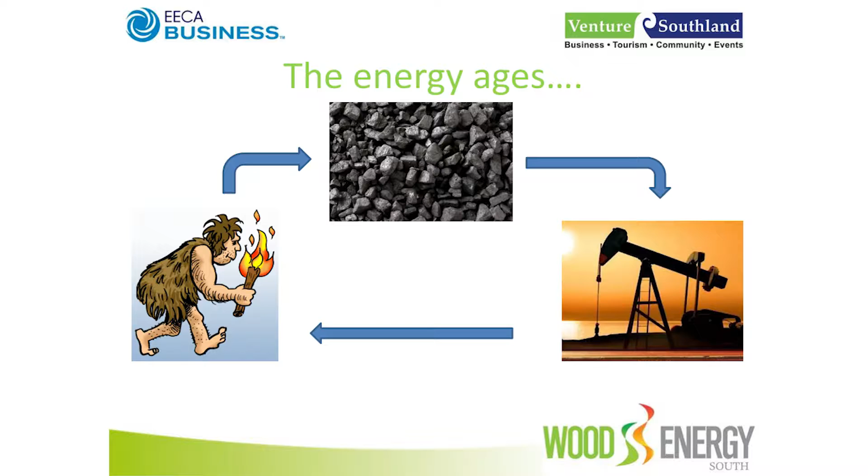Which then led to the oil revolution, and we'd been using oil for quite a while now already. We'd used whale oil, we'd used vegetable oil, but some smart farmer in Pennsylvania in 1859 found some black stuff bubbling out of the ground, so he decided to see if he could pump it out of the ground, and he was able to. That worked too, but it was expensive now, and it's a limited resource.

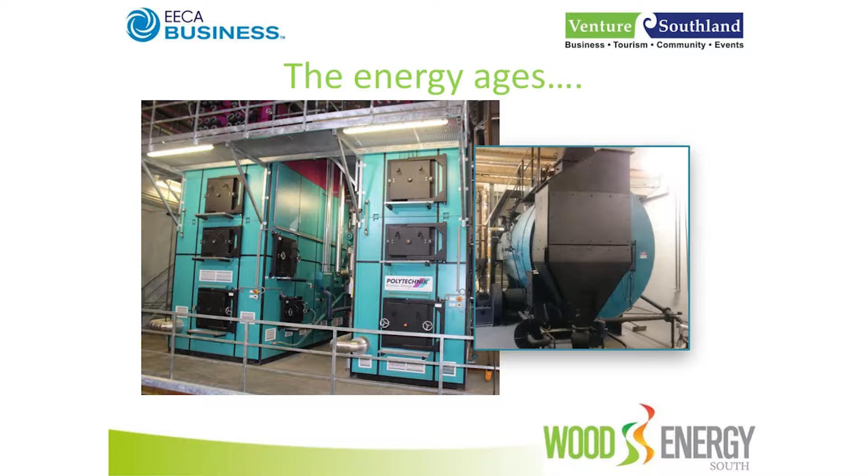And I think our caveman friends would be laughing right now that we're now all huddled in a room together talking about wood energy again. But of course this technology has come a long way in those thousands of years. We now understand how to burn the stuff cleanly, efficiently. We've got the handling of it a lot more understood, and we've been doing that for years now. We understand heat recovery and how to dry our fuel as well.

So just a bit of a political environment that we're sitting in right now. Steve sort of mentioned that. We talked about the Paris Agreement, and the government in March this year announced that it will be removing the ETS subsidy over the next 3 years. So that will slowly go, and MFE have done some work already, and at our current stance we're going to have 150 million tonnes of CO2 deficit, which is a cost of $3.75 to $7.5 billion.

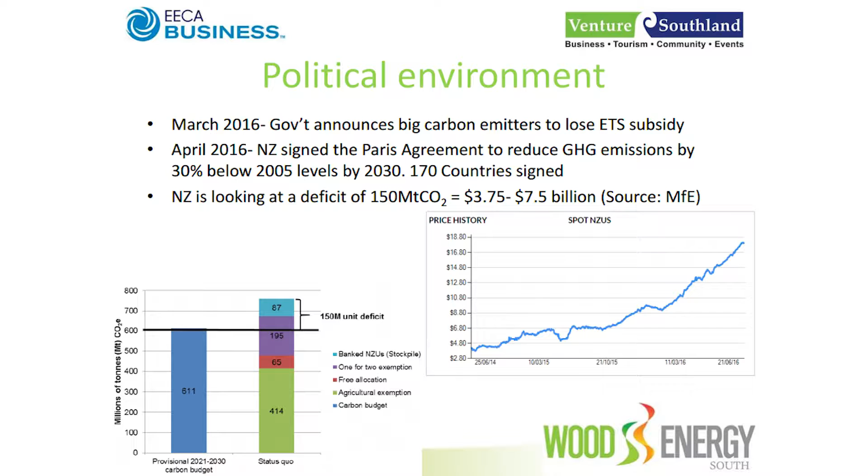And this is our carbon price right now. It's as a result of what's happening. Our carbon price is taking off, and it's sort of settled a bit now. This is sort of sitting around $17.90 right now. So that will help wood energy. But is it enough? Can biomass compete with coal?

I'd sort of developed this graph here just from known values of prices that we've seen in Southland, and once you start getting out to here, for these large users like Alliance, Fonterra, we're talking serious money to convert from coal to wood chip. We're in the millions of dollars, so the price really needs to get up to about $50 for this to start having an impact on coal.

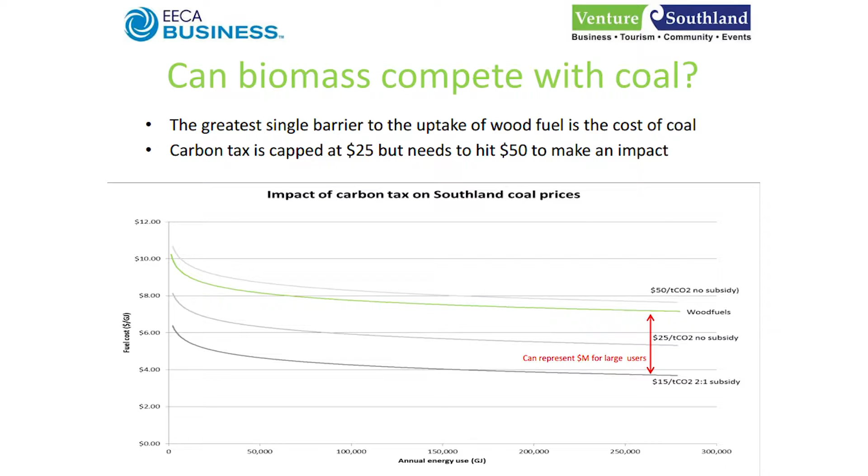So can it compete right now? It's a tough call for these big users, the Alliances, the SCMs. So yeah, it's difficult. We need to get that carbon tax up, or we need to find a cheaper source of wood fuel. So can we produce wood fuels that are cheaper?

I guess the biggest surprise that we got when we went over to Europe was the sort of fuel that was going into these boilers. It was absolute rubbish. It was green. It had all sorts of bits and pieces. I think I saw a bit of a jandal in one of them. It was really all sorts. It was really, really surprising.

They come from compost rejects. They come from bark, demolition waste, branches, pine needles and compost. There was still a market for high quality fuels like we have here, but that was more aimed at commercial, schools, the universities and the likes. These are the sort of prices that they were getting over there.

And yeah, so every site I went to, you saw this type of fuel. And one of the sites we went into, there was a tree. It was about 2 to 3 meters long and probably about 100 mils diameter. It made it all the way through the fuel delivery system and got stuck just before it went into the boiler. You know, they just throw all sorts of rubbish into these boilers and it burns them.

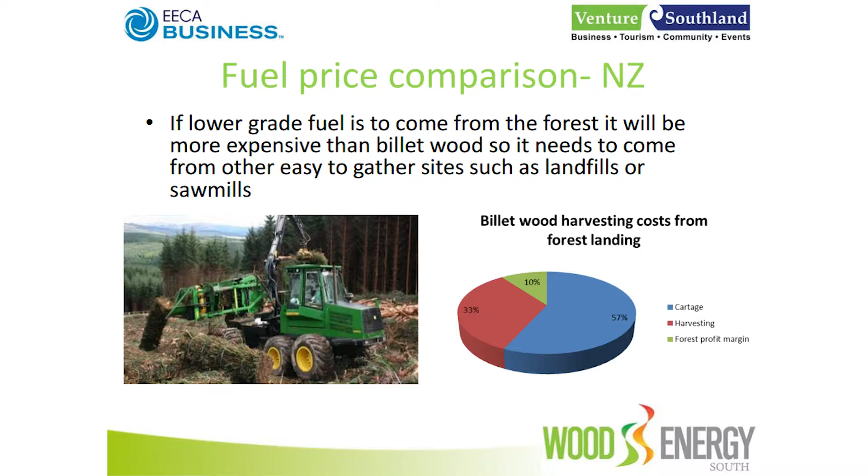So if we start going into, this picture here shows a bundler. Now, I'm not aware if there are bundlers even being used in New Zealand. They sort of go in and scrape the forest floor and grab everything off the bottom and then bundle it up together and send it out. But every time you handle something, it's going to cost you more money. So at the moment, the way our forestry is set up, the easiest and probably the cheapest bit of wood to grab is going to be the billet wood.

If we're going to have to go and grab those smaller bits and pieces that are 1 metre long, there's going to be more handling, and so I can't see how we are going to get down to those sort of values at the moment. So can we get it out of the bush? I'm not sure about that, but can we get it from other areas such as landfills or the sawmills, the green waste? What other waste streams are sitting around? Wooden pallets? What will that do? What other waste resources are around that we could be utilising?

Dunedin, for example, I'd be interested to see how much hops comes out of the Speight's Brewery House. You know, what have we got down here that we could be looking at as another potential biomass source?

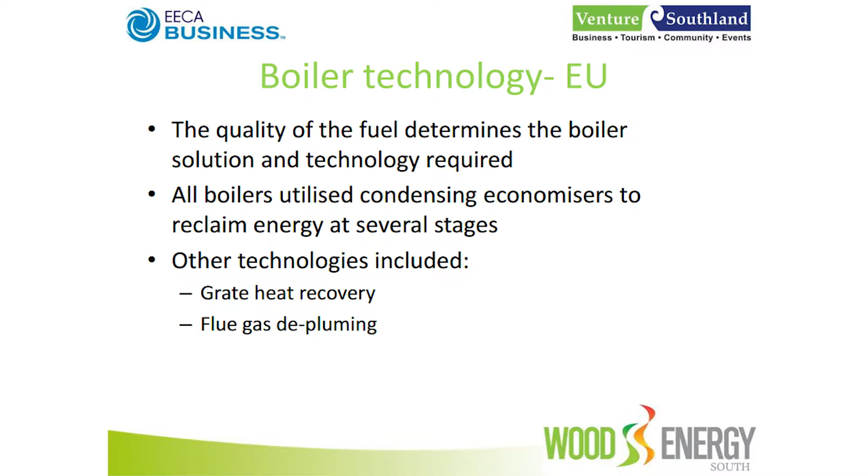Because of the quality of their fuel over there, you needed a really sophisticated boiler to burn it. All of their boilers utilised condensing economisers. They reclaimed energy at all different stages of the process. They had grate heat recovery, grate cooling. They did all sorts of interesting technologies over there, and it's sort of reflected in the type of fuel that they were using.

So this is a screenshot of a boiler. This is a Polytechnik boiler, and it isn't very clear to see, but what you can see in here is our temperatures. So we're getting 600, 800, and then up here we're getting our 900 degree temperatures. So we're getting our highest temperatures in our secondary combustion, nowhere near the flames.

And then we're doing our work, and what I find interesting is following this temperature profile back through the exhaust system. From here we're getting into 200 degree temperatures. We go through an economiser, we've dropped down to 150. So they'll use this for pre-drying something. They'll use it for doing some work on the grate. They might even use it for pre-drying the air coming into the system. They might even do something with the fuel.

We follow that again, 140, 122, and we're coming out of the stack at 41 degrees. So you can actually put your hand on the stack. And they'll use that anywhere. They'll use this for all different parts of the process. There's a heat recovery here that comes off this part of the system, and that goes in and heats the grates. Preheats the air, it does all sorts of stuff.

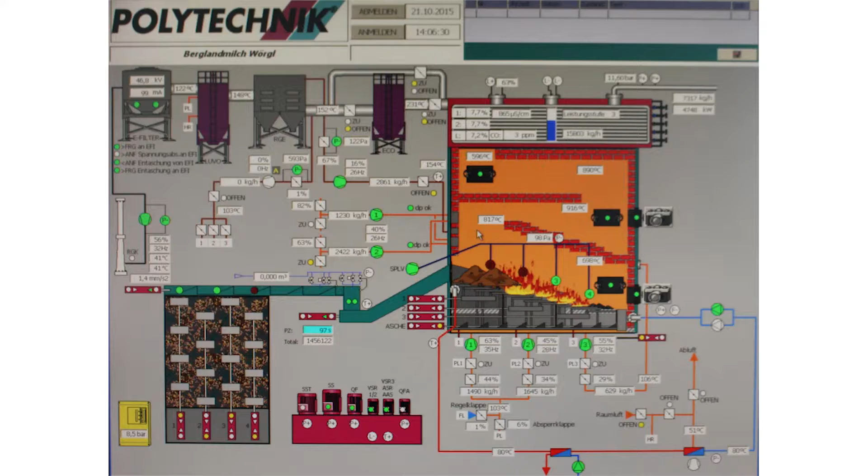So just on that last section between here and this end section here, they grabbed 380 kilowatts of low-grade energy at 70 degrees and used that in another process. But there's a price to pay for that technology, and it was about €5 million for a 6 megawatt boiler, and that was in a dairy factory. So yes, they're using the technology for that awful fuel.

We've got high-grade fuels at the moment in New Zealand, and the boilers we've got are our Scott Andersons, our Tamac, our Rayners boilers, and we're really limited with what you can put through those types of boilers. We're limited with the moisture content. And for large industrial consumers, a seasoned product isn't an option. It has to be a green product sheerly for the volume. You won't be able to season large volumes and store them.

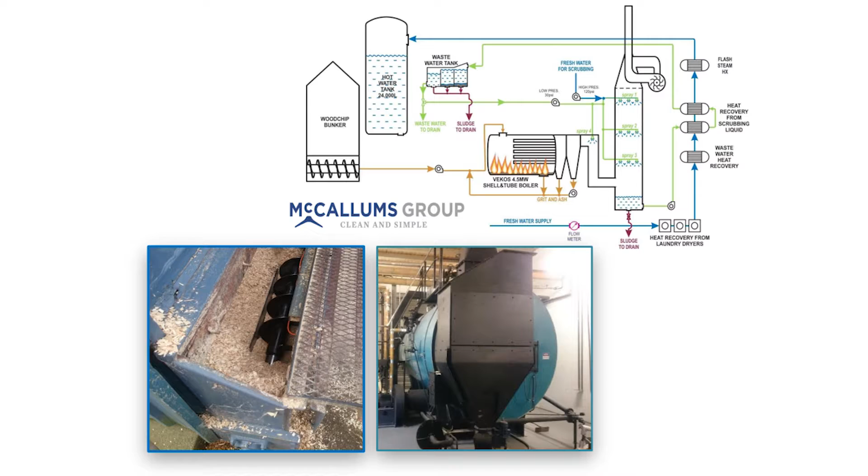But it's got its limitations. There's no way we could throw $6 a gigajoule fuel through it. We'd be really limited.

Other applications we saw while we were over there: of every system we saw, and we went to 11 systems, there was district heating in 60% of them. We happened to be driving to the site when we saw this going down. This was going into a kindergarten that was getting installed, and they were just taking off the district heating loop and feeding the kindergarten. This was a tiny town of 6,000 people. And they had 2 boilers down there. They'd set up for additional capacity with the ability to add another boiler as the system got bigger.

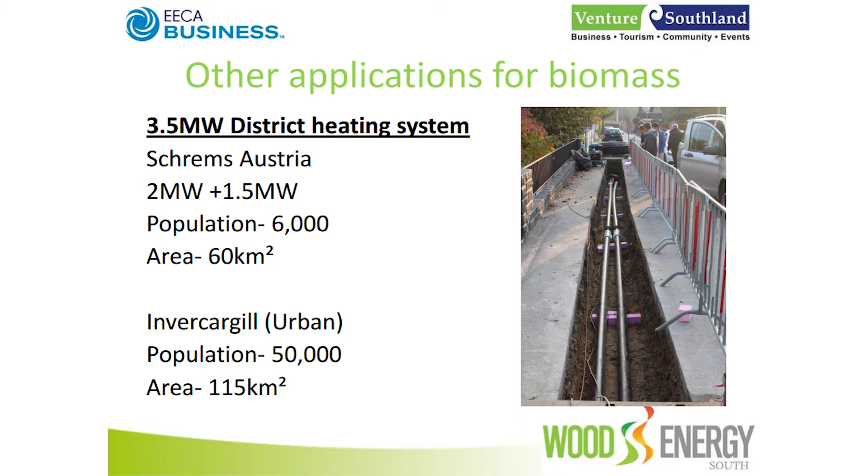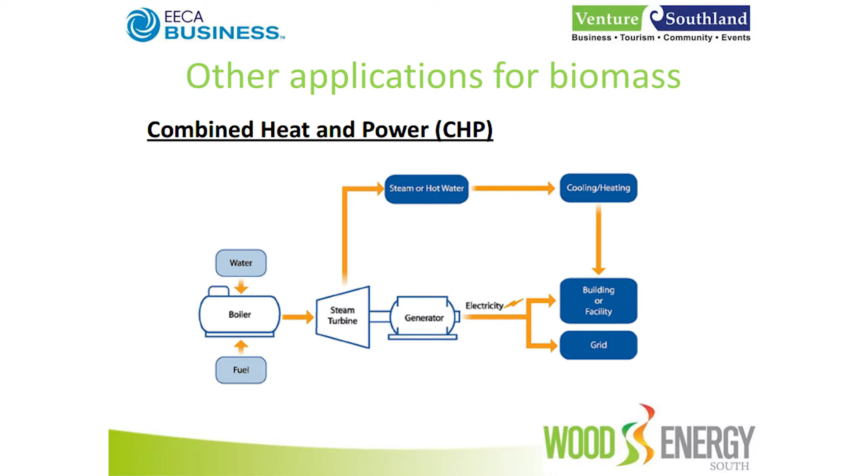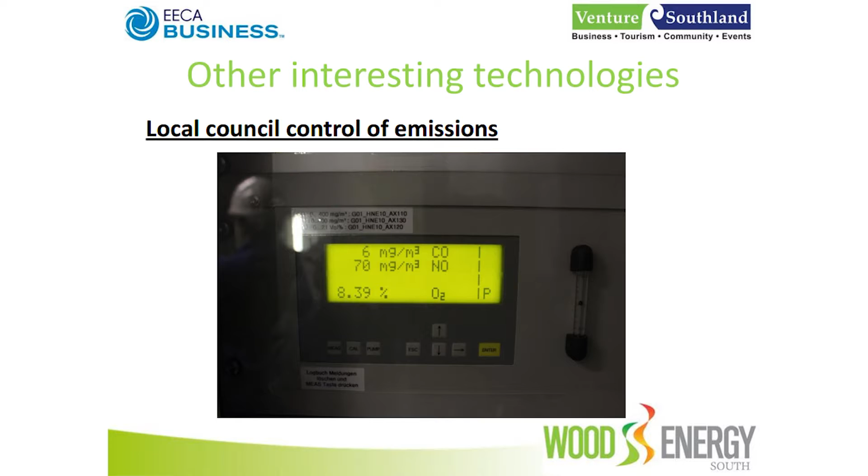Some of the other interesting technologies we saw were just the emissions control. They had a lot of monitoring, and this power plant / district heating system we saw in Düsseldorf, this was actually a screenshot that got sent over to the local district council, and if at any time the council wasn't happy with what they saw, there was a button there that they could push and it would shut down this power plant. So there was a real stick there: if you don't keep your emissions clean, we've got the power to shut you down at any time.

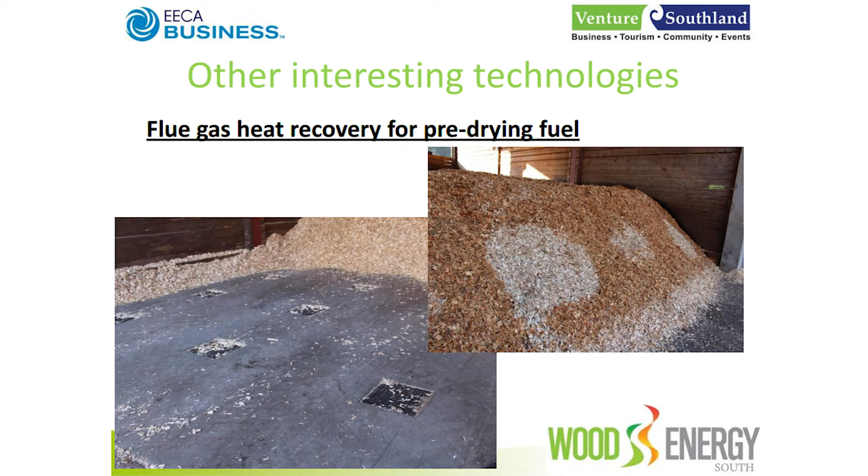We also saw how they were pre-drying their product. They were storing it in sheds, and they were using heat recovery off the flue gas. They built grates into the ground, and these piles were about 1 metre high, and that's 12 metres long, that whole area there. So they put in 1 metre high, dried it, added another metre on top of it, dried it, and then they fed that into their boiler using all of their waste heat. Just a clever idea. I know Otago University are also doing similar things, trying to pre-dry their chip. And I guess if you're buying it at a lesser rate, you're actually adding energy to it, and it's worth more without having to pay for that.

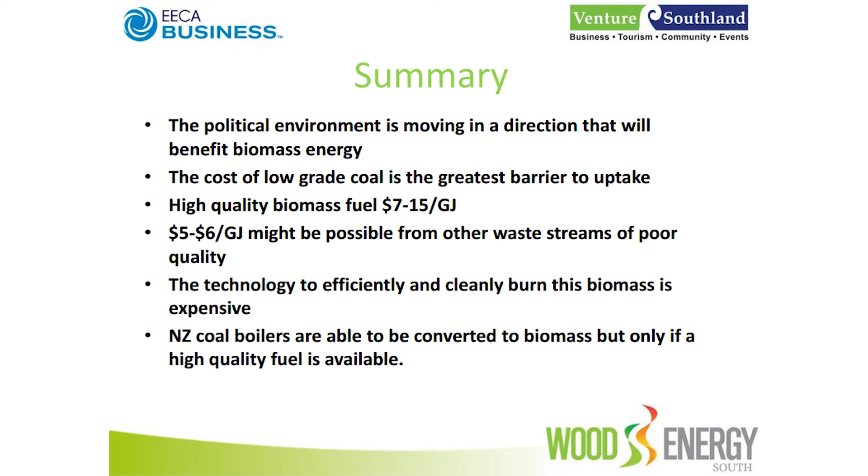Last slide, just a summary of where we're at. The political environment is there for the change that will benefit biomass. Our fuel's now $7 to $15. Can we get down to $5 to $6? It may be possible from other waste streams of poor quality, but then we need the technology to be able to burn this. And yes, New Zealand coal boilers can be converted to biomass, but the quality of the fuel is really the limiting factor for that.